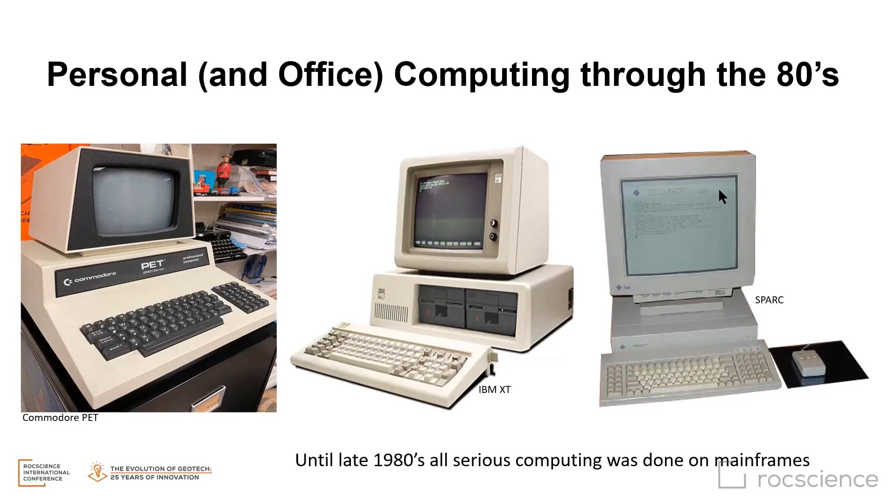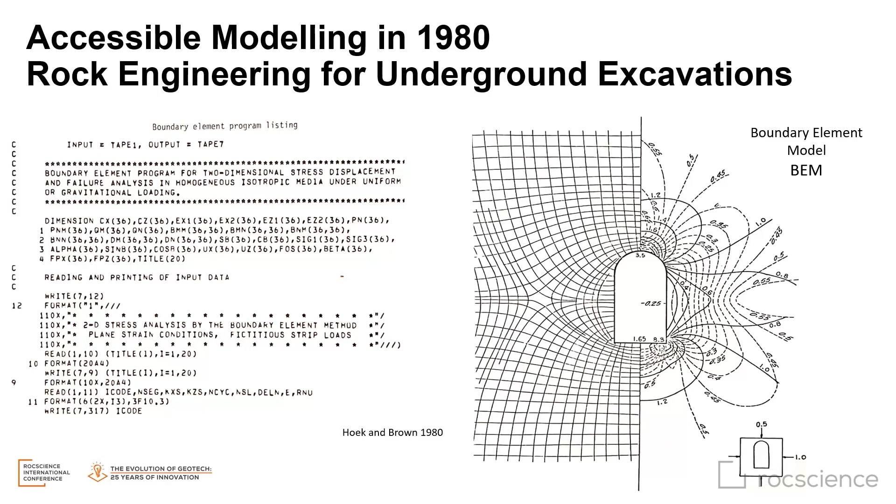My first experience with rock engineering software was the coding of a boundary element program in the back of Hoek and Brown 1980. In the back of that book, there is basic code that can be programmed up even on my Commodore PET with a little bit of input on geometry and stresses and material properties. You can generate a grid from which you can contour the stresses around any opening.

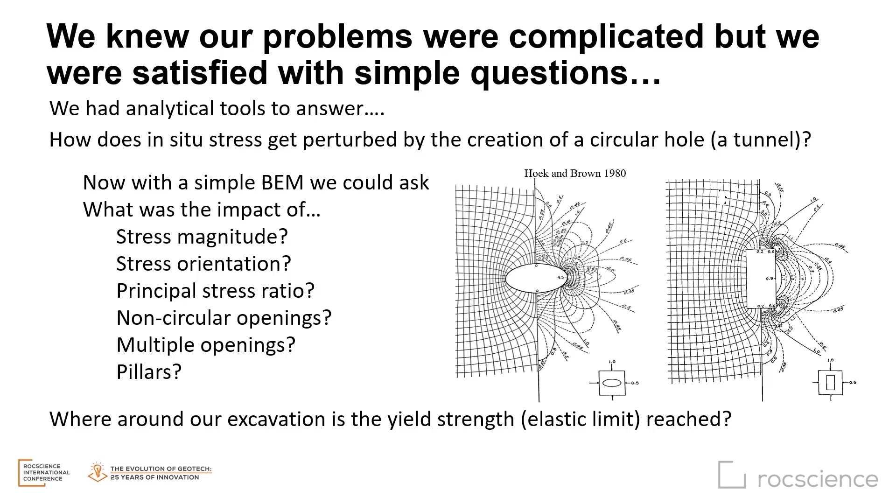Very exciting times. Before that, we had analytical tools to ask how in an elastic material in situ stress can get perturbed by the creation of a circular tunnel. Now with these simple boundary element model tools, we could ask what's the impact of stress magnitude. We could look at orientation, principal stress ratio - didn't have to be isotropic anymore. We could play around with non-circular openings, multiple openings, try to figure out what the true stress state was elastically inside a pillar. Where around our excavation was the yield strength exceeded? These were big questions at the time.

Now, prior to 1988 at University of Toronto, there were many advanced modeling developments in boundary elements, displacement discontinuity models, discrete elements, finite element formulations. I remember some lattice models, fracture flow models. The primary users of these advanced modeling tools were essentially the creators of the models or their colleagues and sponsors.

Also in the 80s, faculty at the University of Minnesota were working on similarly complex advanced models, and they founded the Itasca Consulting Group. In 1984, UDEC was first released for mainframe use. My first experience was with a 3.5-inch disk of MUDEC released for the PC.

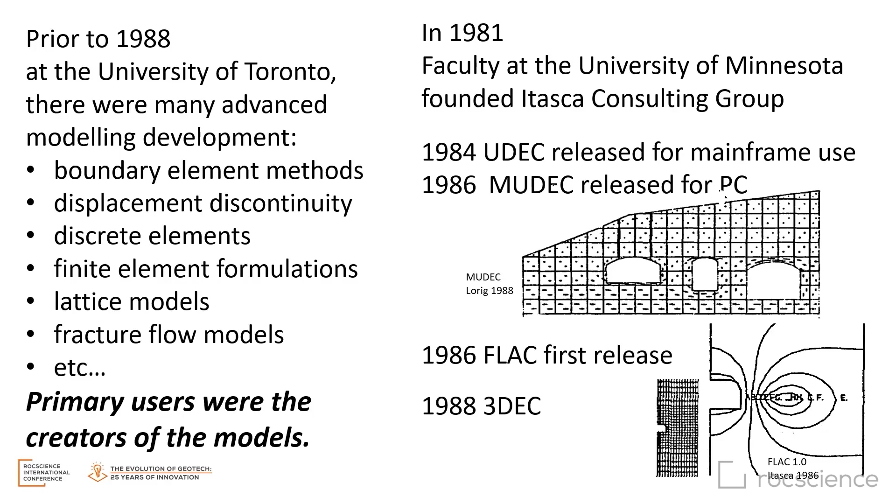FLAC was released in 1986 as well for PC use, and you can see some of the early output there. And 3DEC came along at the end of the 80s.

At the University of Toronto, John Curran and Evert Hoek in 1988 founded the Rock Engineering Group, and they embarked on a mission to make geotechnical analysis software available to practicing mining, construction, and consulting engineers.

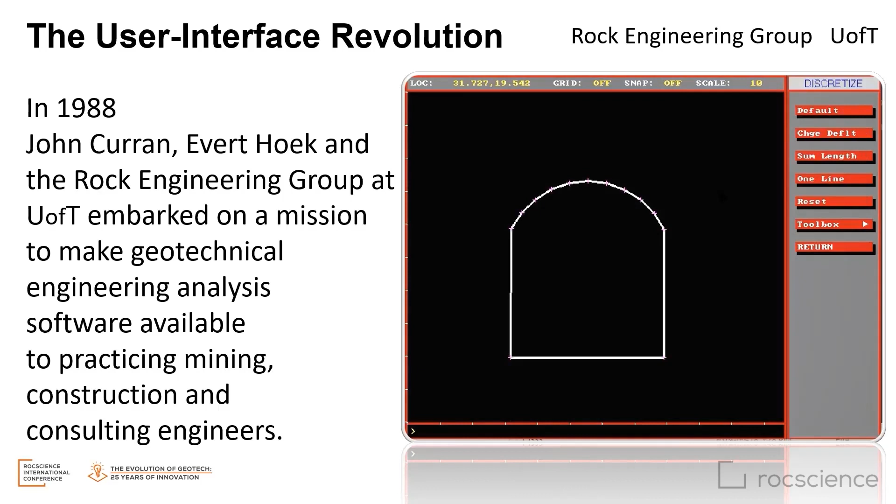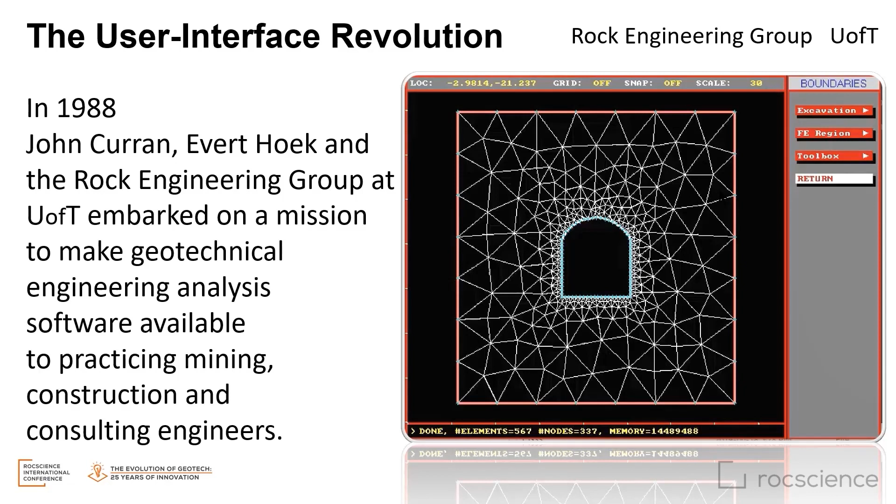On the right, you'll see the early version of Phases, forerunner to RS2. And this screenshot was one of the most exciting times of my graduate school at University of Toronto, when Brent Corkum brought home source code to do automatic meshing around an excavation.

My own personal contribution was in the form of DIPS, for analyzing structural data. This came out in 1988 in some of the beta versions, originally called StudPlot, and worked its way through a number of versions to what we see today.

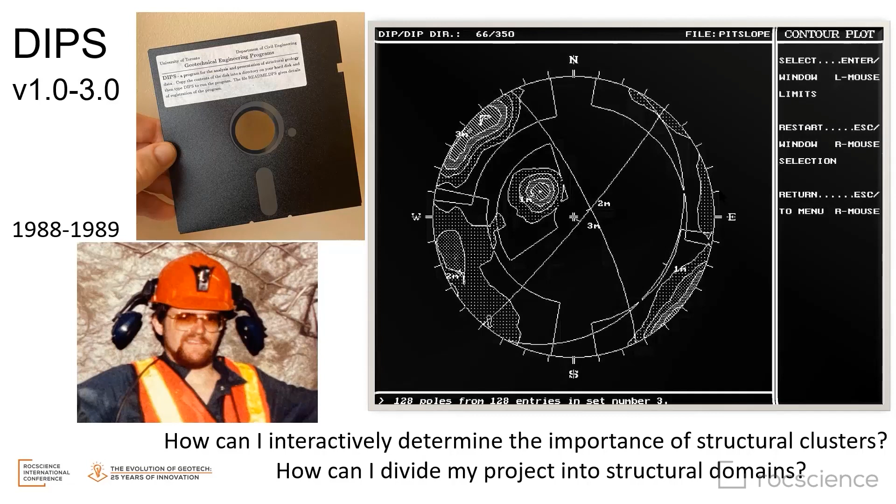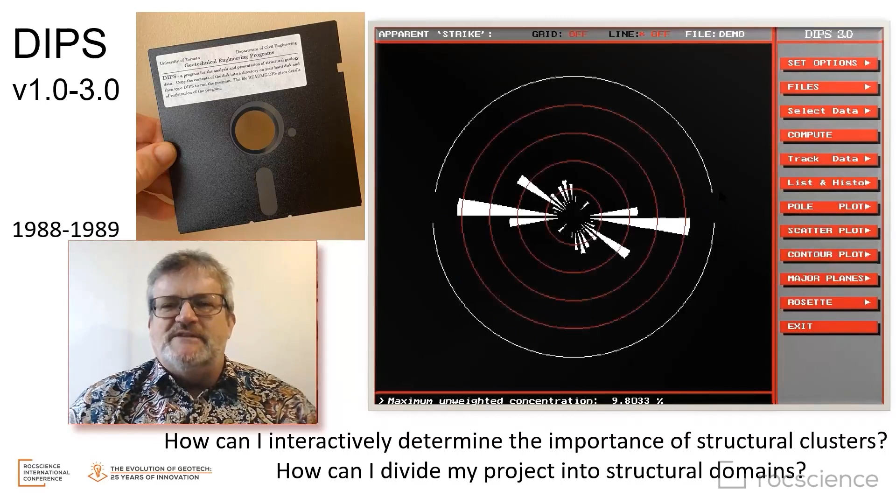With this software, you could ask how to interactively determine the importance of structural clusters. You could play with the data, assess and sort it, and filter it to figure out how you could divide your project into structural domains.

DIPS is still in use today. Rocscience now has added kinematic instability tools, which are very powerful.

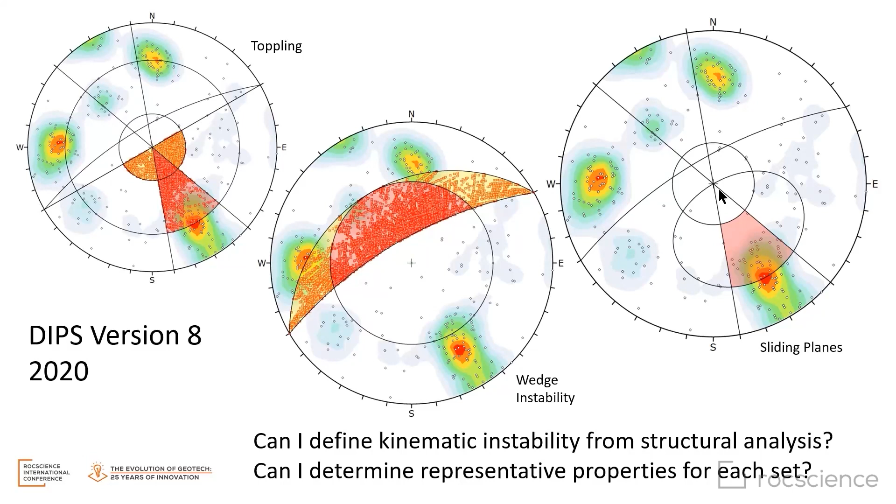Even in the early days, DIPS fed into Unwedge, which was a structural wedge tool, and you can see one of the original versions here.

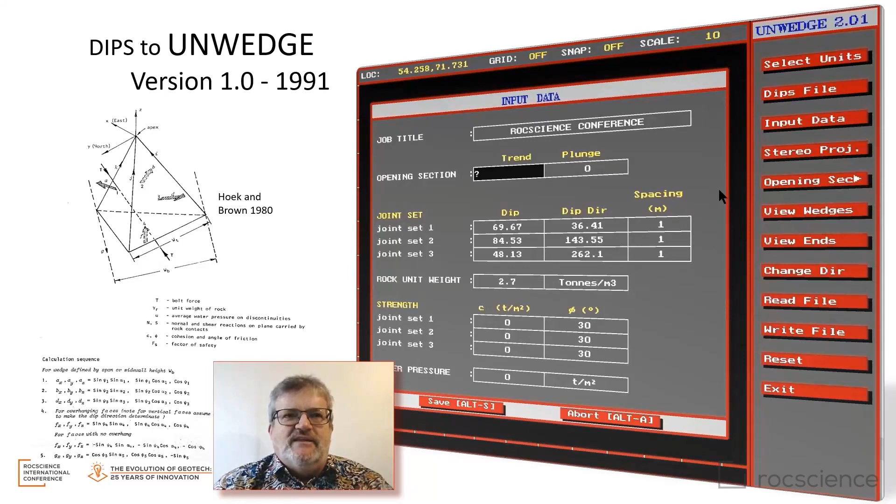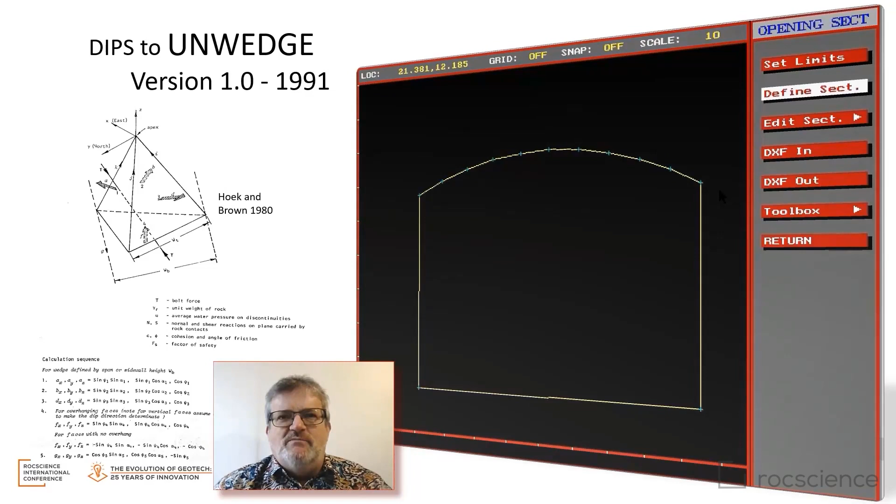And this allowed the user to visualize, again, the formulas that were in the back of Hoek and Brown 1980, to assess how a three-sided wedge would interact with an opening.

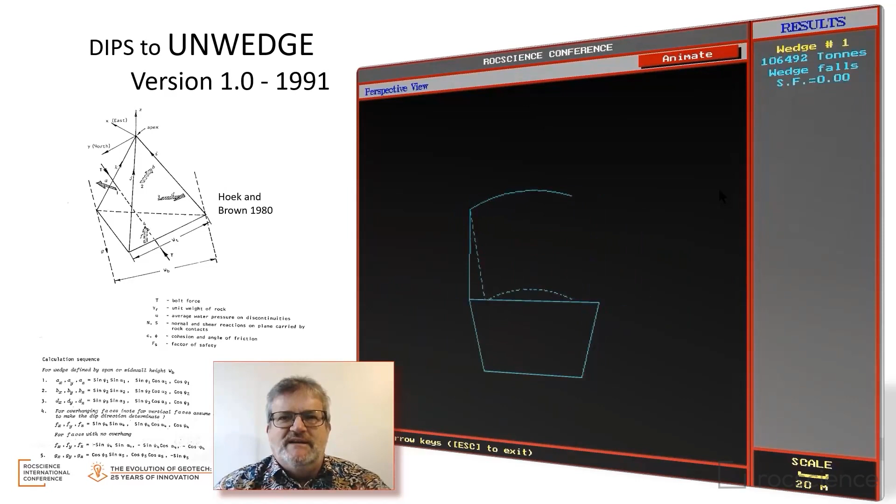And here you can see the original user-friendly, CAD-style input and output, which was quite groundbreaking at the time. This program is still in use today. It's one of the first tools that many tunnelers and cavern designers reach for preliminary analysis and even in some cases support analysis.

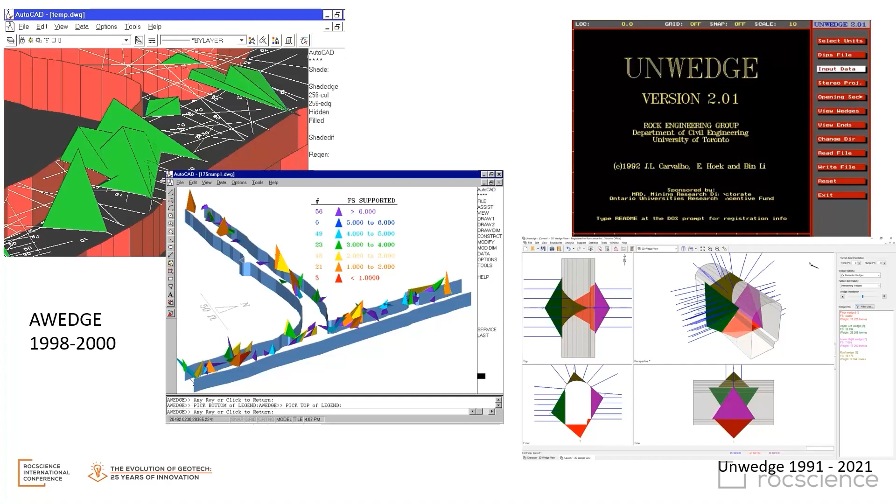Using the same formulas from the back of Hoek and Brown, end of the 90s, I also developed a piece of software called AWedge, which was built into AutoCAD to do a similar set of analyses, but for discrete wedges in discrete locations based on actual mapping.

Unwedge itself lives on. This is just some work I did some years ago in the Brockville Tunnel, which is now open for tourists. It's a fabulous location when COVID's over to go visit.

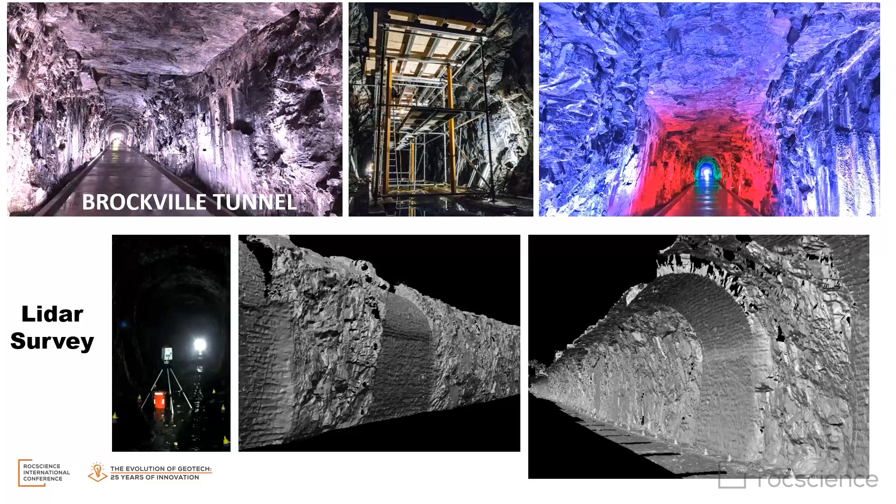But as part of this feasibility safety stage to reopen this tunnel, we did some LiDAR scans. Those LiDAR scans were automatically turned into StereoNets.

And then using DIPS and Unwedge, we were able to show where bolts were needed, but more importantly, where the unstable blocks had already fallen out during construction, and we could retain as much as possible of the original tunnel profiles, just using a simple tool like Unwedge.

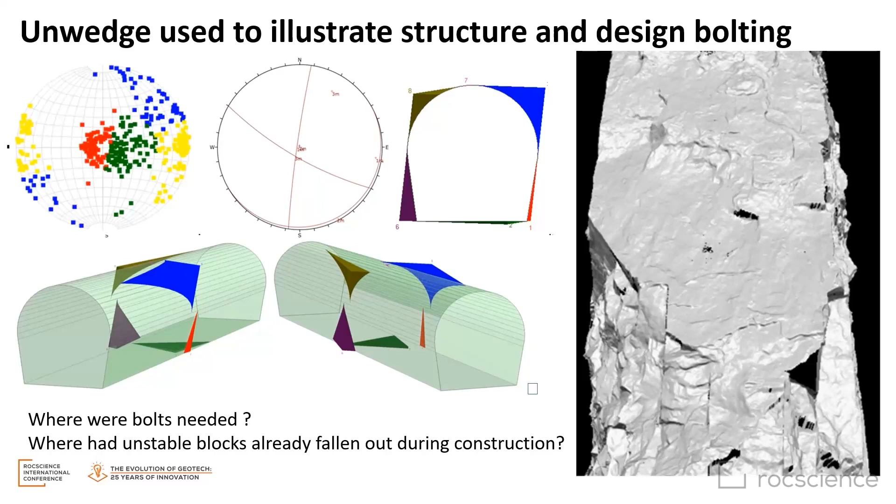Now, Examine 2D grew from this source code in the back of Hoek and Brown, and it was, again, a very simple actual algorithm, but incorporated into a user-friendly framework. This was, I believe, our first release from the Rock Engineering Group at U of T.

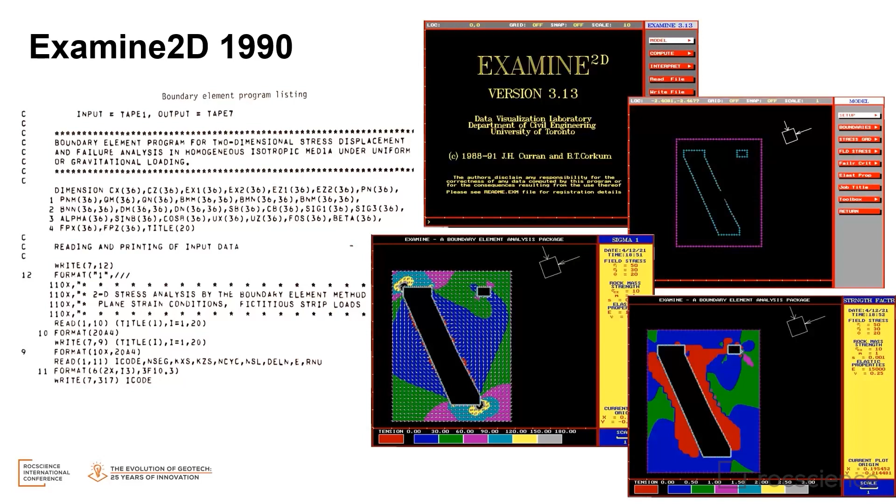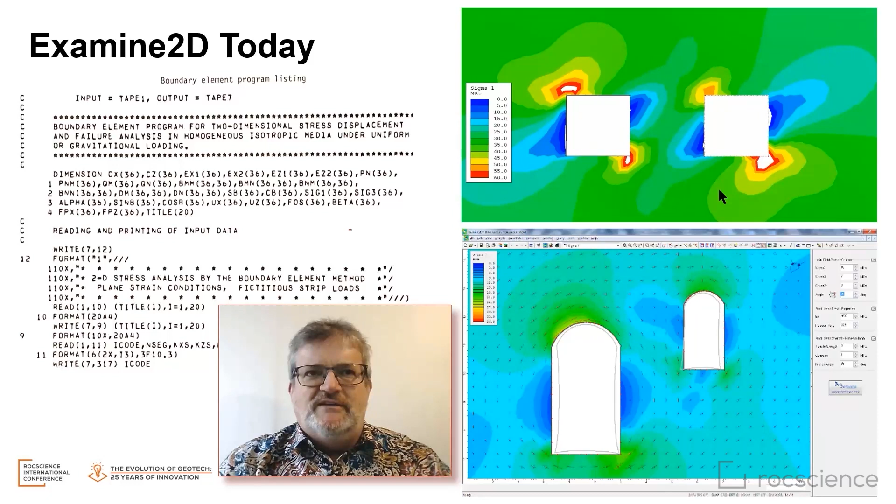And this program today is still extremely useful for education. There's nothing like real-time examination of stress flow around openings. It's been coded up as well into Windows, and I think there's still a future in Examine 2D.

Now, of course, this basic idea can be expanded into 3D, and these models were around prior to the 90s, but their incorporation into 3D user-friendly software in the form of Examine 3D or Map 3D really revolutionized mining analysis in particular, and complex cavern geometries where tunnels are intersecting.

Here we could look at how the interaction of excavations changed the stress field. Could we optimize geometries for the stress? How would large mine openings affect smaller distant tunnels? These were all questions that were now open to be answered through 3D elastic modeling.

Now, we knew that the modeling was elastic and that yield was not happening. But as long as we limited our questions within those constraints, it was incredibly powerful.

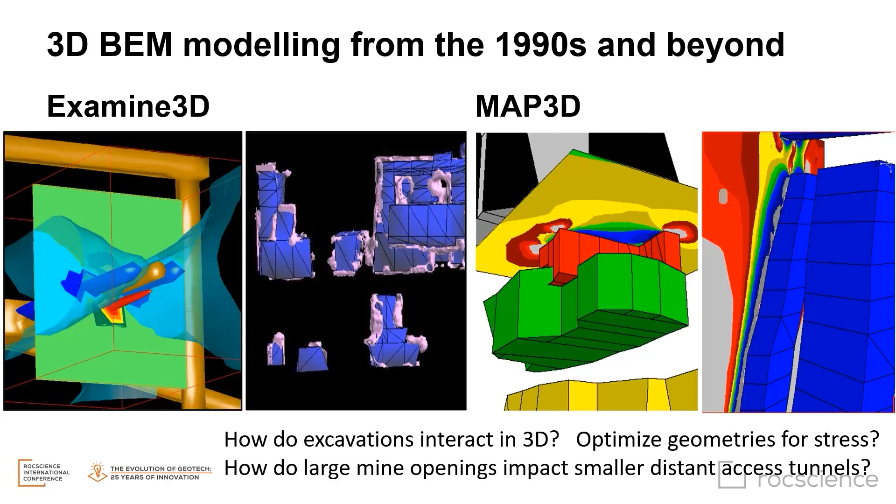So interestingly enough, the rise of user-friendly software coincided with a major celebration of rock engineering in the form of the 5-volume comprehensive rock engineering set published in the early 90s. One could say that those volumes were a celebration of elite rock engineering done by experts.

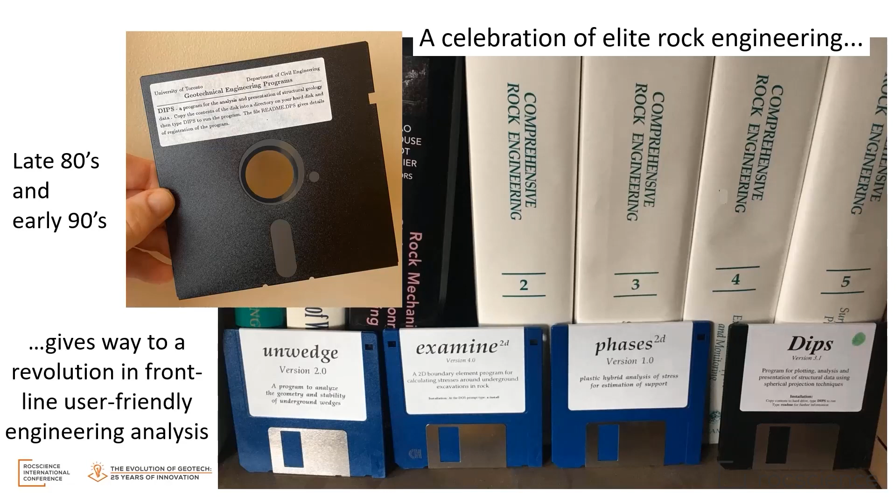And this revolution in user-friendly interface development gave way to frontline rock engineering. And I'll say, for better, for worse.

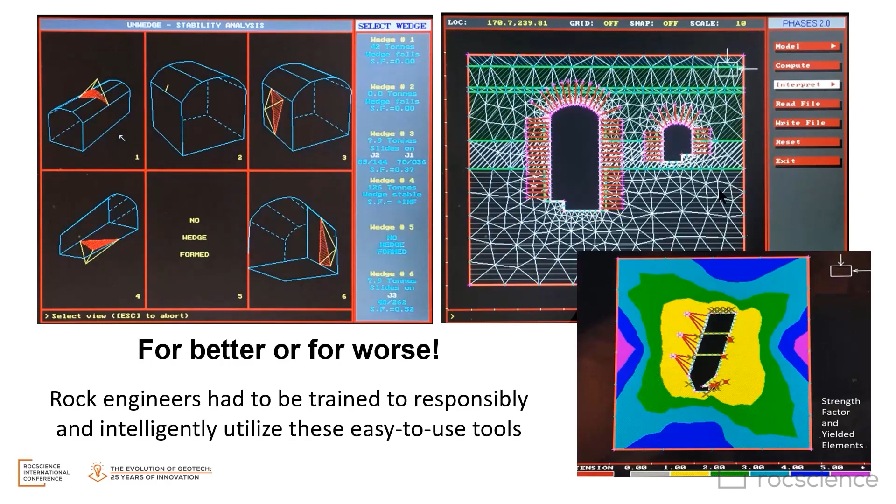Of course, lots of people worried that these models in the hands of a non-expert were dangerous. But I would argue that with proper training, the ability to do what-if scenarios, to answer simple questions in situ without going to a consultant, was one of the biggest contributions of the rock engineering group and ultimately Rocscience, and of course Itasca as well, following suit.

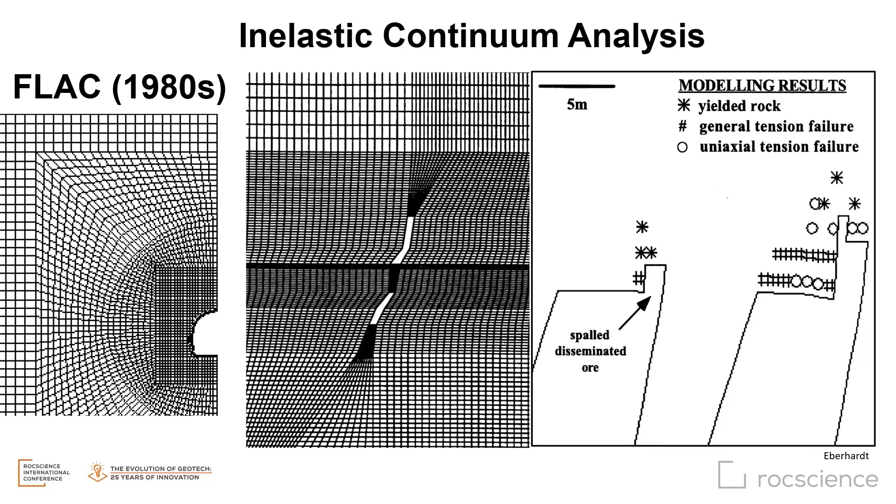Here you can see some early FLAC analysis, some early FLAC results in the inelastic continuum. This also became user-friendly in the 90s, and it posed a problem: now we had to figure out what our continuum rock mass strength and stiffness was.

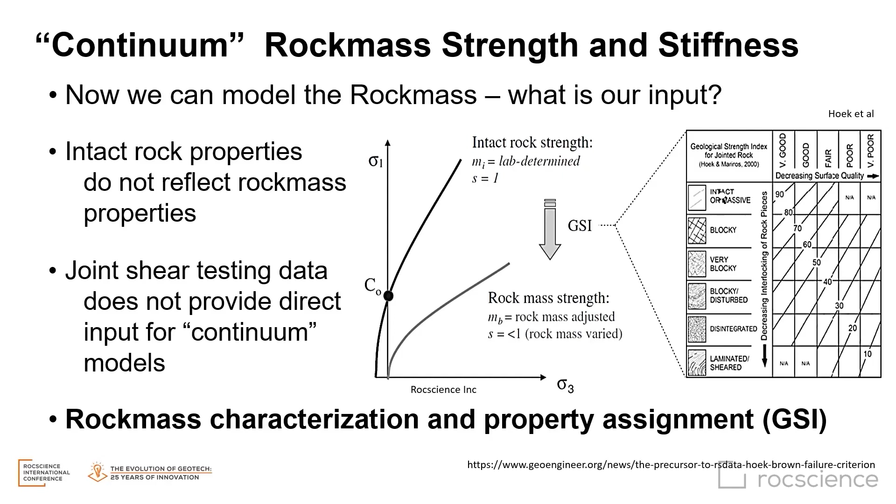Dr. Evert Hoek was the primary author of the GSI system, which allowed us to characterize the rock in situ and convert that characterization into a factoring for rock mass strength and stiffness. We realized that intact properties did not reflect the rock mass properties in the field, and joint property data didn't really have a place in our continuum models. So at the time, GSI was the only way to get rock mass properties into a model.

Inelastic continuum modeling we could do in the past without these tools, but we could only answer simple questions about yield in a circular and isotropic stress field. Within a program setting, we could look at yield in anisotropic stresses, yield around non-circular openings, and experiment with the effect of post-yield response and multiple openings.

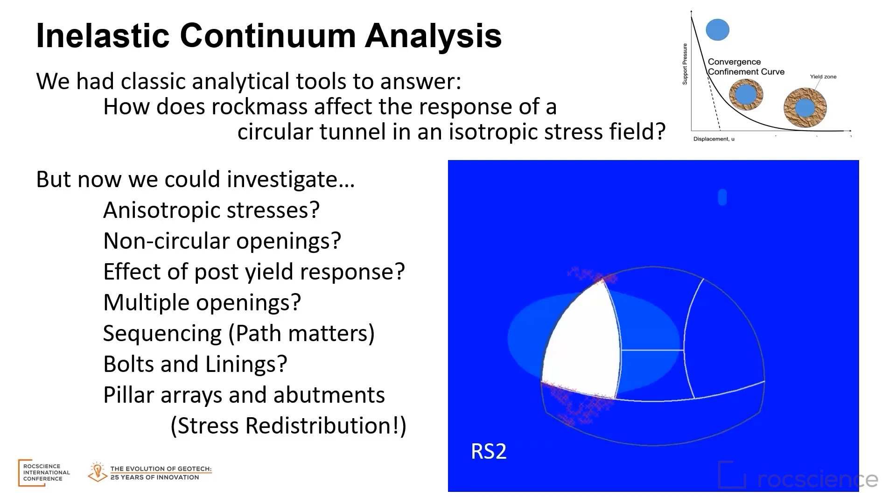Sequencing became a major concern because once rock begins to yield, the path matters. So we could optimize excavation sequence for sequential excavation, and we had the power to examine support and look at stress redistribution for the first time as well.

There are many, many forms of continuum geotechnical models today. The Rocscience and the Itasca codes are just two of the suite of programs that are out there. But the very powerful user interface connected with very powerful algorithms today, I would say, dates back to those early days in the late 80s and early 90s.

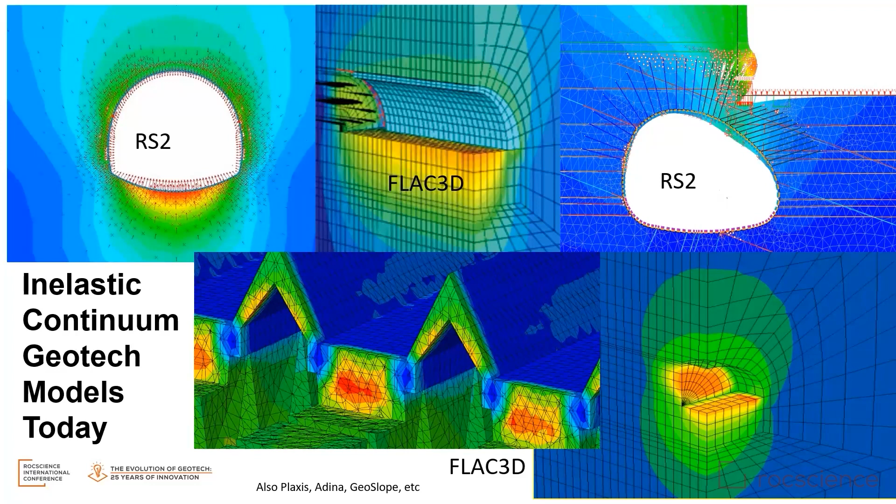I'll pause here just to ask, speaking from the practitioner, the field engineering viewpoint: when we use these programs for design, are we asking any more sophisticated questions than we did, let's say, in 1980 or in the 1990s?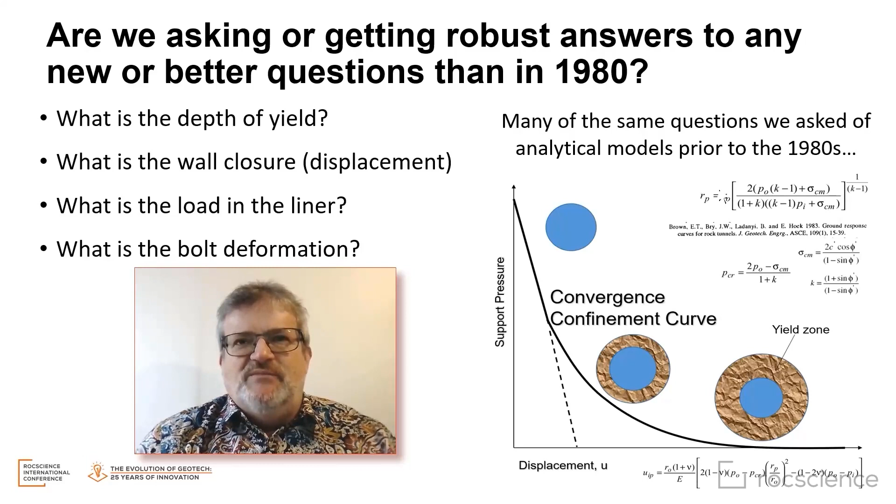Primarily, we're modeling to find out the depth of yield, how much closure there is, or average closure in the walls and roof, what's the load on a liner, and what are the bolt deformations. So while we have more complicated models and can view more complicated scenarios, the questions are pretty much the same that we asked back in the 1980s with our analytical solutions.

Now, there are some new questions that we can start to answer, and we do. What is the post-yield behavior of a rock mass? That's a big question. Does the post-yield lab response, which we can now measure in our lab experiments, mean anything in the field? How do you model post-yield for an in-situ rock?

We have tools, we don't know if they're correct. How about for a rock mass? How do you measure or specify dilation parameters, the volume change after yield in a rock mass? How much yield is too much? If you have a complicated system, material yield does not immediately mean that the system is failing.

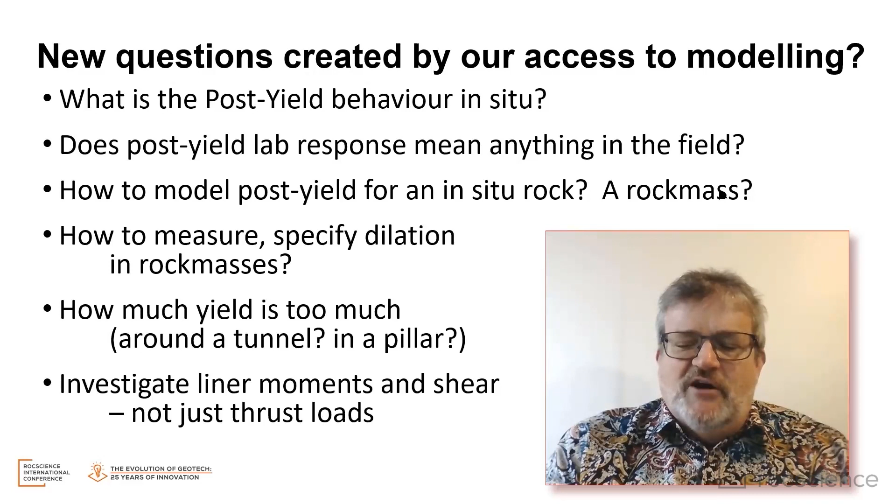Now we can also investigate liner moments and shear in our tunnel linings, not just thrust loads, and we can analyze in a much more sophisticated way the rock support interaction. I'll just tackle a few of these issues.

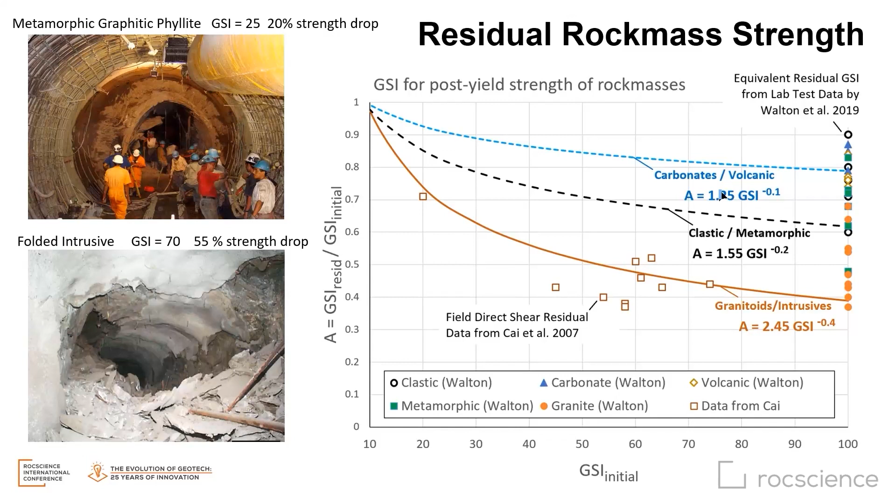So rock mass strength, post-yield or residual rock mass strength - I would argue that we still have no solid tools to estimate residual rock mass strength. In the paper, I propose a possible solution to this problem, coupled with a dilation model.

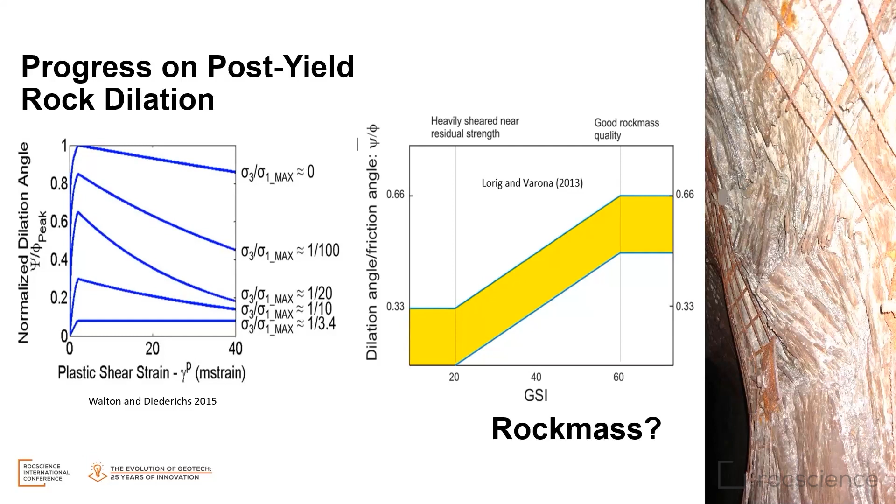We have some guidance from intact experiments, and some guidance from basically experience, but these are all very approximate tools. I'd argue that we need more sophisticated versions of these to move forward.

One question that's of great interest, both in mining but also in civil construction, is when do pillars or a pillar fail as a system? We can track rock yield, but that doesn't necessarily mean pillar failure.

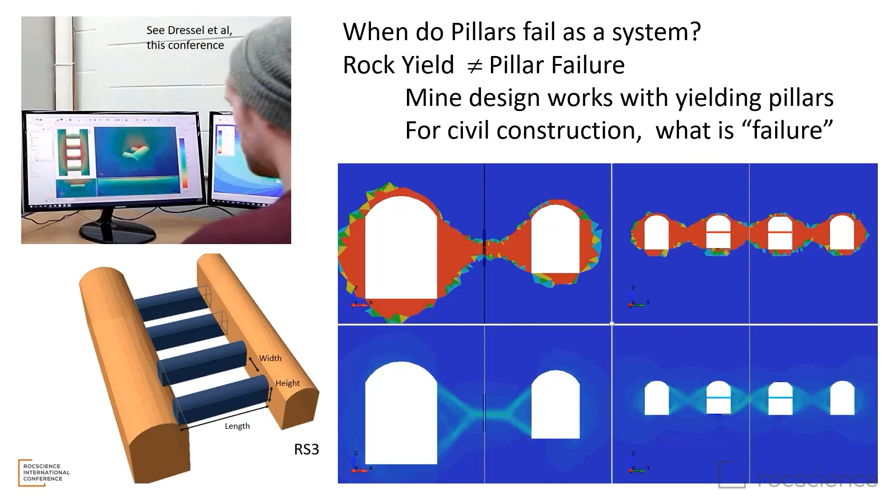So mining design works with yielding pillars all the time. For a civil construction project, first we have to define what we mean by failure and then how we measure that in our models. Now in mining, we use sophisticated 3D mine-wide models along with seismicity to track the yield of the rock mass and the effect that has on the surrounding rock and other regions.

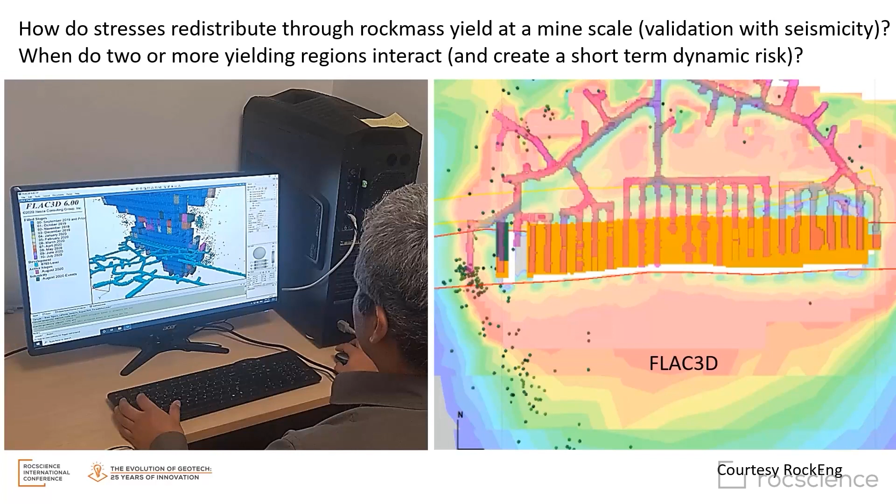One of the big questions, of course, is when do two or more of these regions interact, creating sort of a short-term rise in activity at the mine and possibly a dynamic risk.

We also have the ability to use these tools for complicated sequential design in non-mining applications. Although this is a mine, it's essentially a civil construction of a 150 meter high double crusher station. You can see the FLAC 3D results on the right, looking at how stresses flow as the material gets constructed.

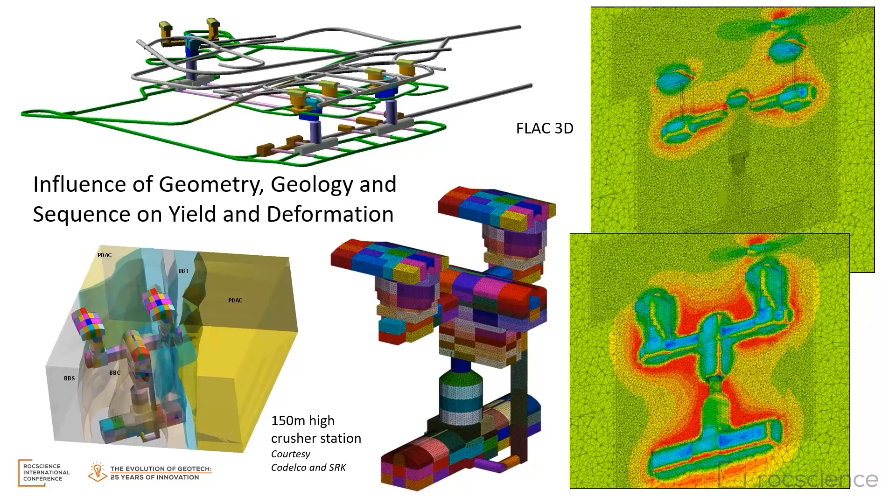There's multiple geologies in this model, and each color represents a construction stage. Just picking out one stage here for the upper loading bay. For the various bolting scenarios, we can look at bolt response, loading of the bolts, and the moment and thrust capacity of the liners compared to our design targets.

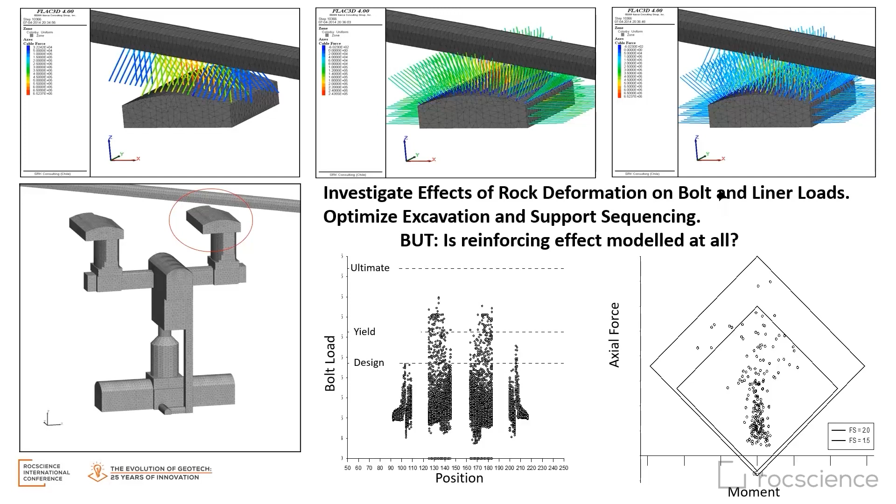But we're not really asking what the support is doing in the model. This is one of the problems with continuum modeling that we live with, so we make sure we simplify our questions accordingly. We're not modeling the reinforcement effect of the support in the rock mass, we're modeling the effect of the rock mass deformations on the support.

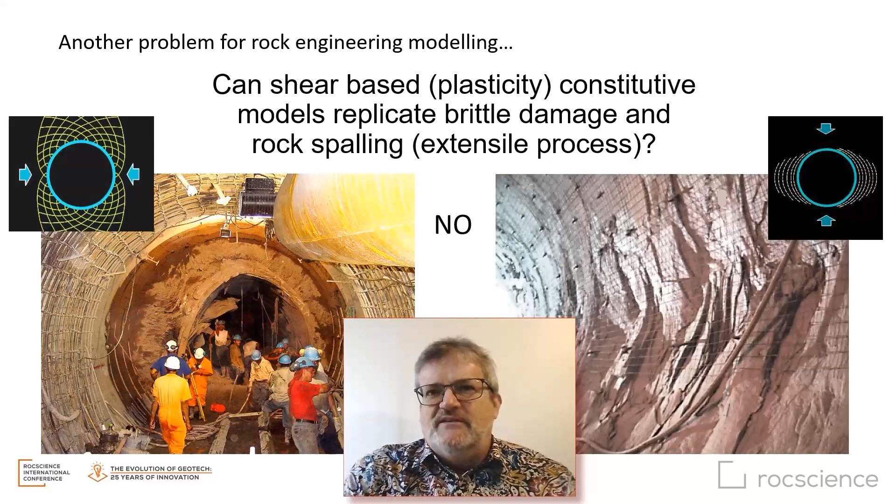Another challenge for rock engineering modeling: can conventional shear-based constitutive models, traditionally used in continuum modeling, replicate brittle damage and rock spalling? In theory, no. Where we have squeezing tunnels, the model we base the analysis on assumes everything is shear-based, whereas we know brittle fracturing, particularly in early stages, results from extension fractures. So can we still use continuum models to do design analysis for this type of behavior?

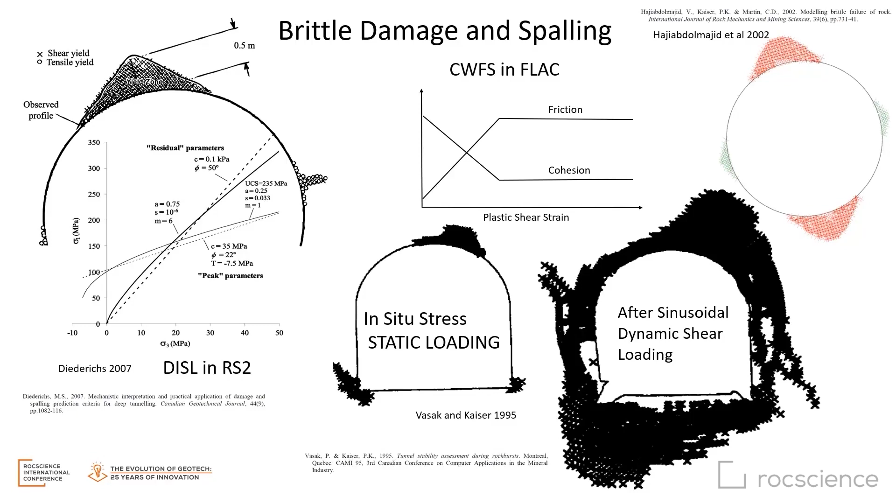The answer is yes. There have been two developments over the last 25 years. One is cohesion weakening friction strengthening, which works well in FLAC, a time-stepping algorithm, based on the notion that cohesion and friction are not mobilized at the same time in brittle materials. As cohesion loss occurs, friction increases, creating a brittle fracturing mechanism at lower confining stresses. On the left is the equivalent version for a program like RS2, which has instantaneous drop from peak to residual. You can still very accurately replicate brittle fracture in a continuum model.

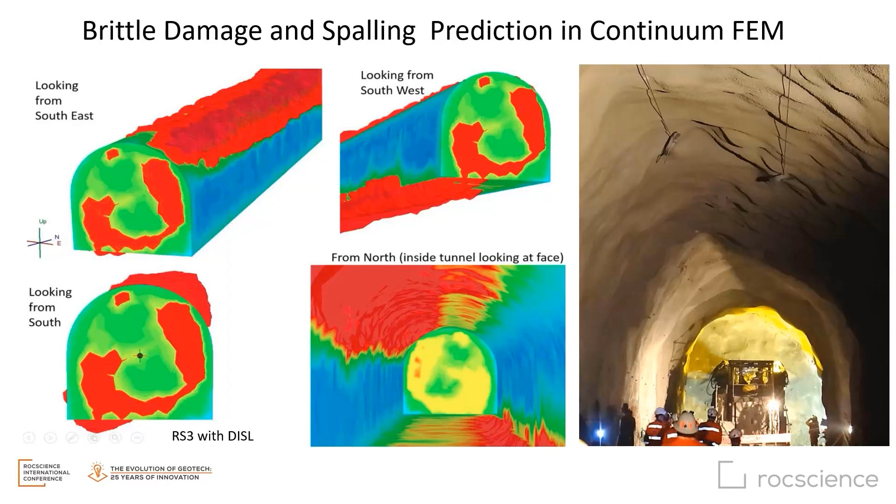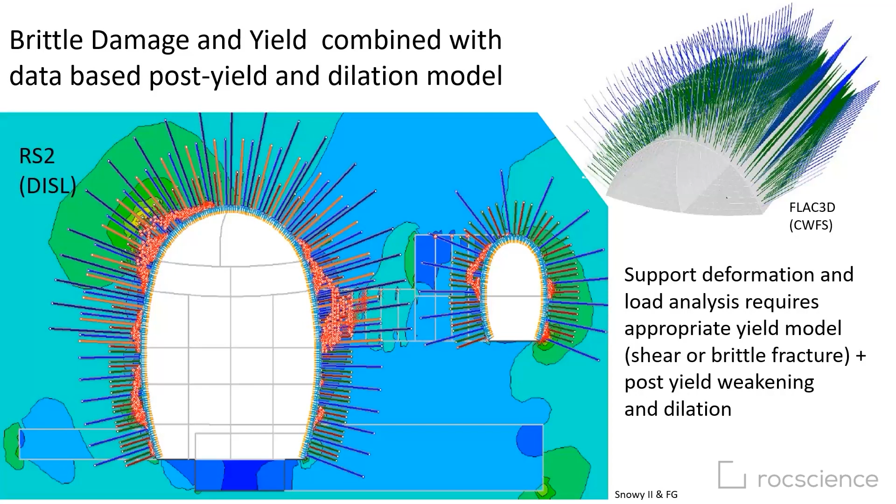This is very important because when simulating situations like this in an access tunnel, the brittle model is key to giving appropriate overbreak estimations and the risk of floor heave. If we combine brittle criterion with optimized dilation models, we can do much better estimating support requirements and support demand for brittle rock around excavations such as power caverns, leading to optimized support element design and component design.

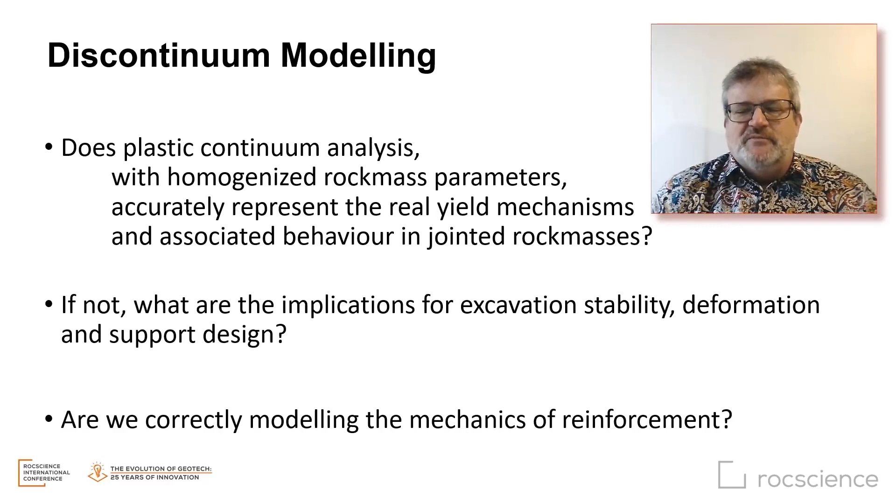Discontinuum modeling has actually been around longer than some of the continuum tools we have. We have to ask: does plastic continuum analysis with homogenized rock mass parameters, GSI, accurately represent the real yield mechanisms in moderately jointed rock masses? And if not, what are the implications for stability, deformation, and design? Are we correctly modeling the mechanics of reinforcement if we smear all the rock mass structure into an equivalent continuum?

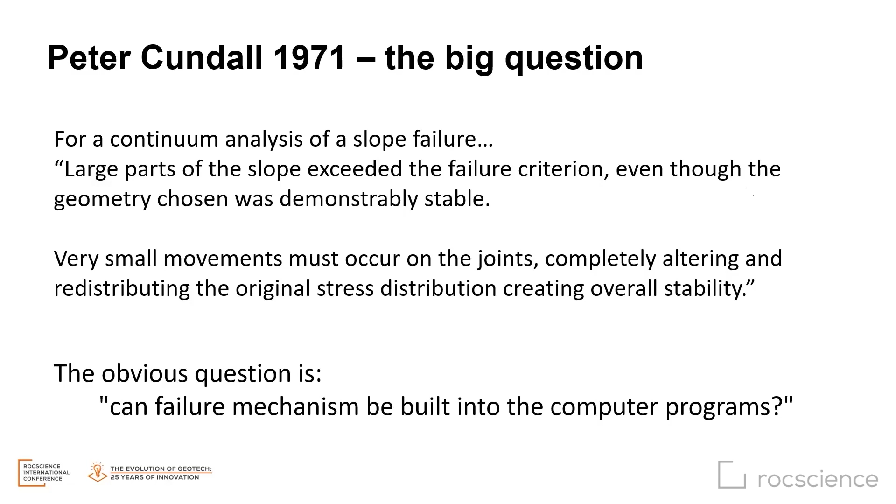I take us back to 1971, when Peter Cundall wrote his PhD researching rock slope failure. In one part of that document, he examines a continuum analysis of a slope failure problem and asks: why did large parts of the slope exceed the failure criterion, even though the geometry chosen was demonstrably stable? He concludes that very small movements must occur on the joints in the real situation, completely altering and redistributing the original stress distribution, creating overall stability. The question he asked in 1971 was: can failure mechanisms be built into computer programs?

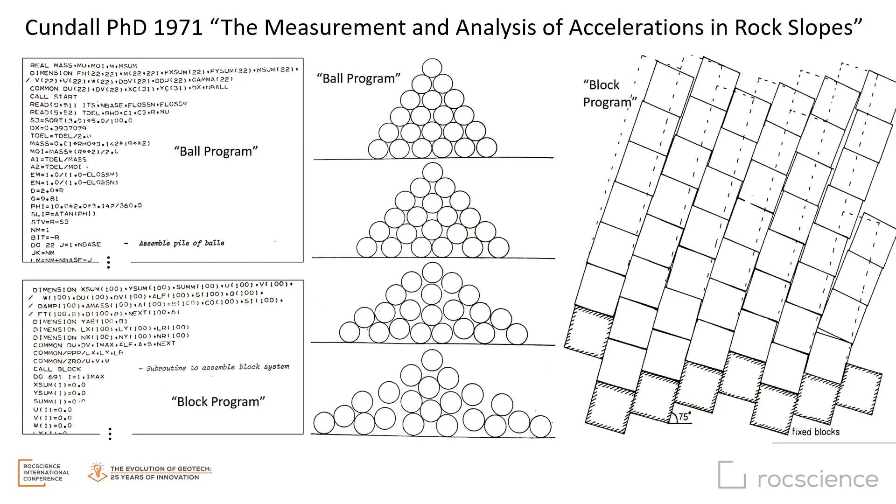In the appendices of this PhD on slope stability, you'll find the original source code for the ball program and the block program, which we now know as PFC and UDEC. The key to these early discontinuum models was to keep the questions as simple as possible, because these models were incredibly complex and chaotic. I remember using these in the early days and being astounded by how one small change would change the outcome of the model. So the key is to ask very simple questions.

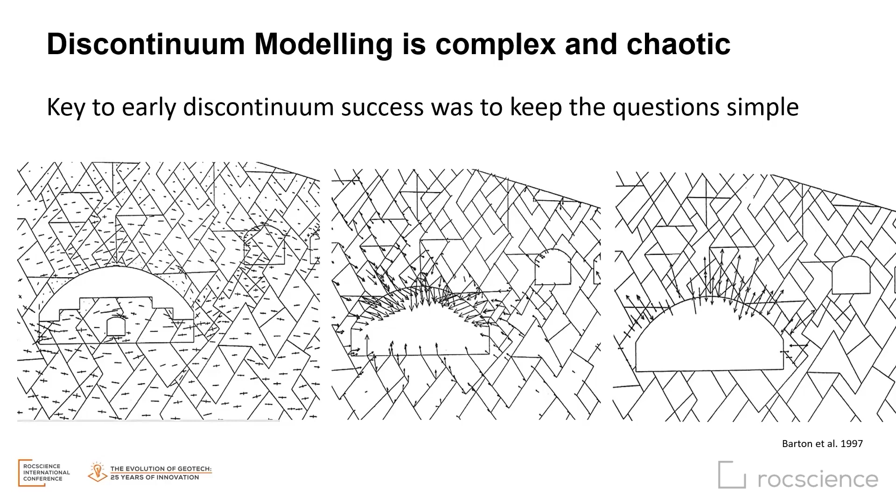This particular analysis from Barton et al. '97 of a hockey cavern in Norway, the largest cavern I believe still to be constructed for civil purposes, the key to that design and its successful application was the questions asked. Simply: can rough joints modeled with confinement-dependent strength and post-yield dilation create a stable and clamped arch? How big could that arch be? Was there an optimum sequential construction sequence to achieve that arching?

In other words, letting the rock mass do its own work. And then, can reinforcement knit any mobile blocks together at this large scale to limit localized slip and create a reliable, stable arch?

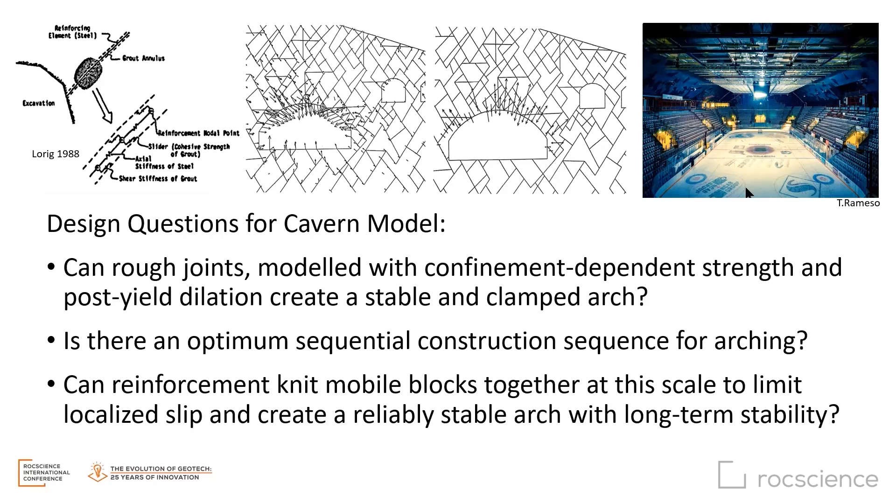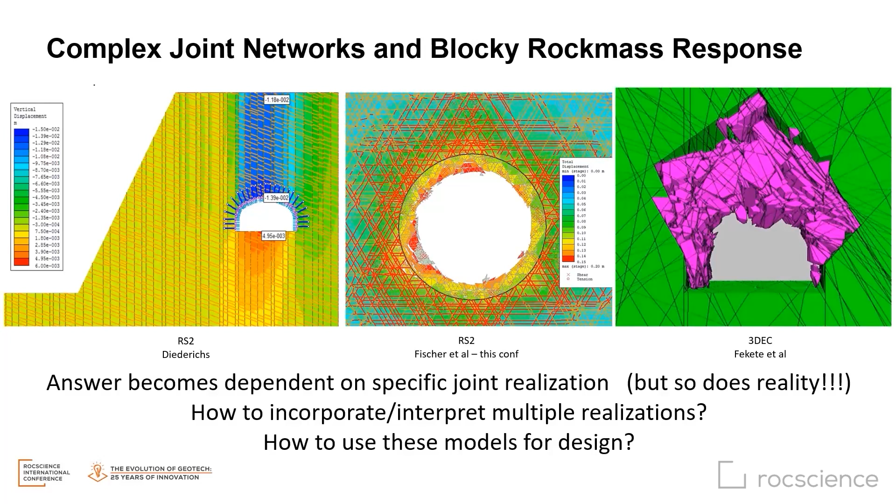Of course, now we have very sophisticated versions of these discontinuum tools. The answer, however, is very dependent on the specific realization, the random generation of the joint elements themselves. But in actual fact, so is reality. So in a sense, this is the complexity of the model mirroring reality. The challenge is how do we incorporate or interpret multiple realizations and then use those for a reasonably repetitive and robust design?

Now, in recent years, LiDAR has come along as a very powerful and routine tool in surveying of underground openings. We can take two surveys at some time apart, compare them, and get an actual 3D map of the deformation.

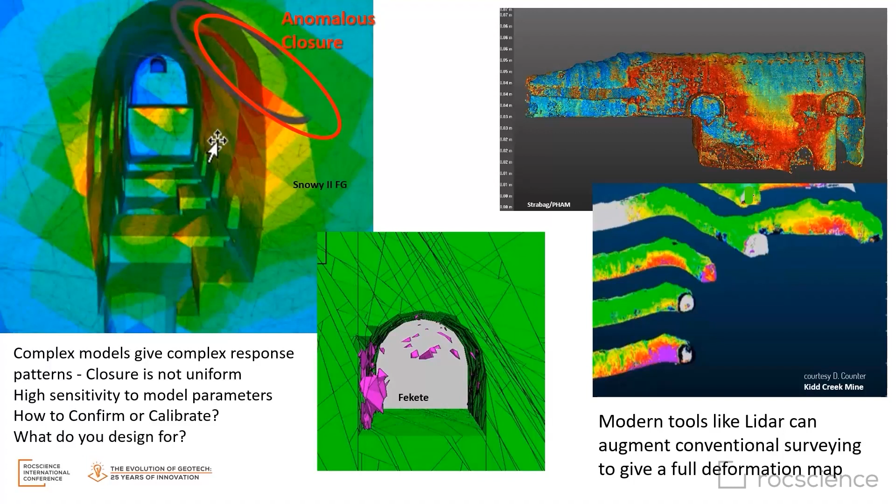Now, a lot of questions, small and large, raise their head when we do discontinuum modeling. Do we have the right models for the joint surfaces? There are very many commercial constitutive models for joints out there. Do we have the right one to best represent what's going on our particular fresh, rough, altered, slickensided joint surface? How do we take 50 millimeter lab samples in direct shear and upscale them to 2D and 3D?

Now with these discontinuum tools, we realize that joint stiffness actually has a meaning beyond just settlement. How do we incorporate that into the model? What numbers should we use? And is the test actually giving us the right numbers for modeling? How do we measure this behavior and compare it to reality?

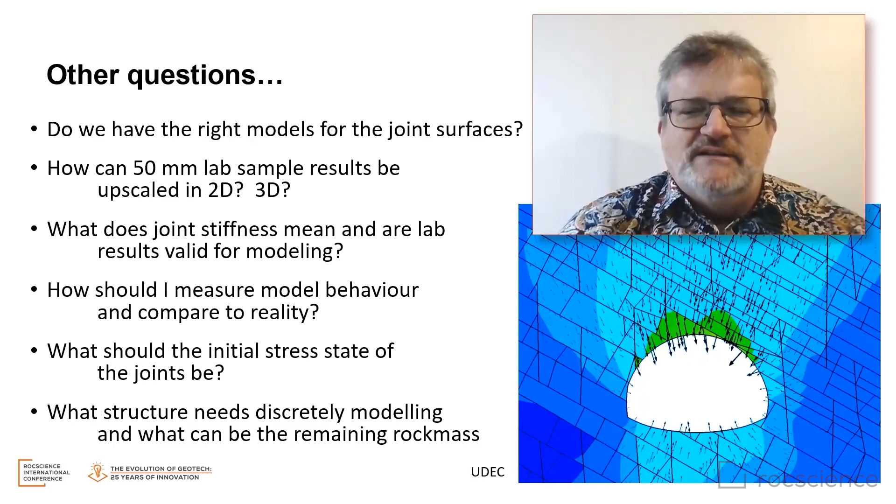There's other issues about how do we initialize the joints in their stress field? And what structure do we need to actually model to get the right answer? And what can we just leave as part of the remaining rock mass?

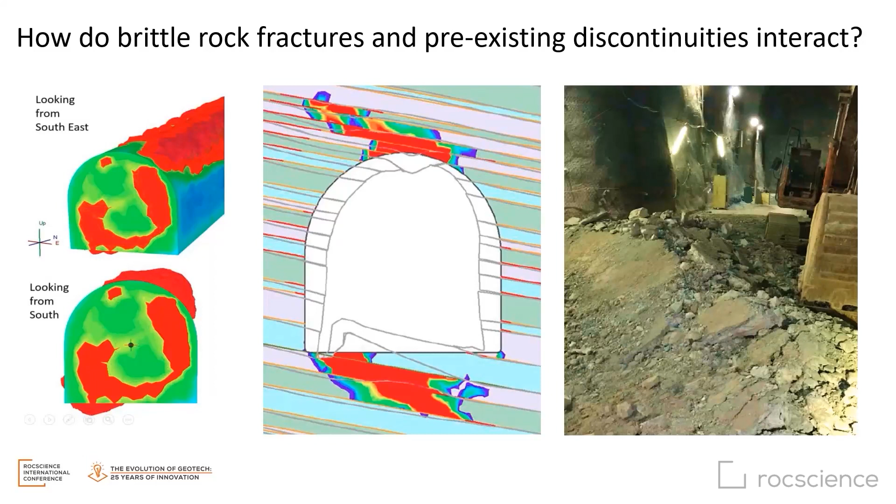In my own work, I've used discontinuum tools to examine how brittle rock fracture processes and pre-existing discontinuities, bedding or joints, interact to create very large-scale and anomalous failure modes. In this case, brittle fracture interacting with unfavorable bedding planes, in this case volcanic bedding, to create a very localized but very aggressive floor heave.

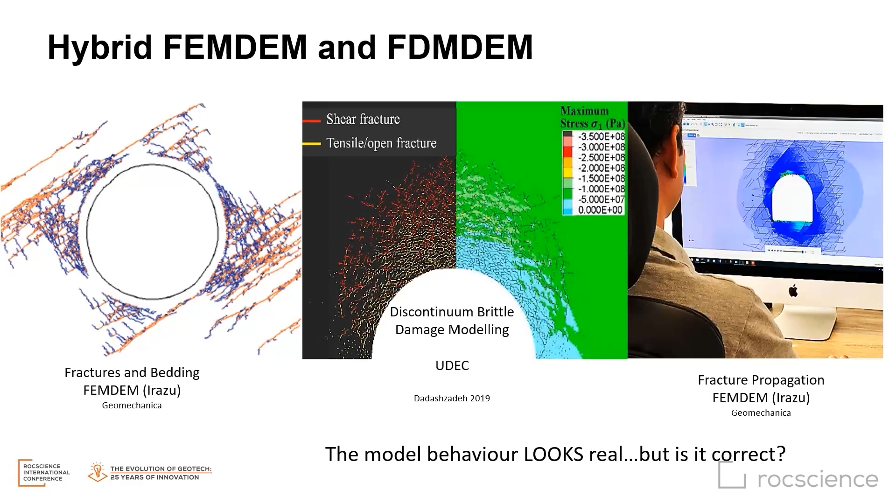Now we have very sophisticated hybrid tools, if you will. I've got a couple examples here of FEMDEM from Geomechanica and U of T, and UDEC from Itasca, looking at how rock fractures move up into the rock mass and interact. These fractures can then also be used in a coupled model to see how permeability of the rock mass increases, etc.

Some other issues that we're starting to realize are becoming a very big challenge in complex rock mass modeling: time-dependent behavior, which we've played around with for many decades. Creep, consolidation, relaxation, degradation, swelling. Whatever the mechanism is, we have numerical models that claim to simulate that behavior, but the models are very simple. They're often phenomenological, not very mechanistic in nature, which gives us difficulties when we take lab experiments and try to upscale them to some realistic properties and then apply them in the complex geometry and geology of our models. We have no tools for estimating time dependency of real rock masses.

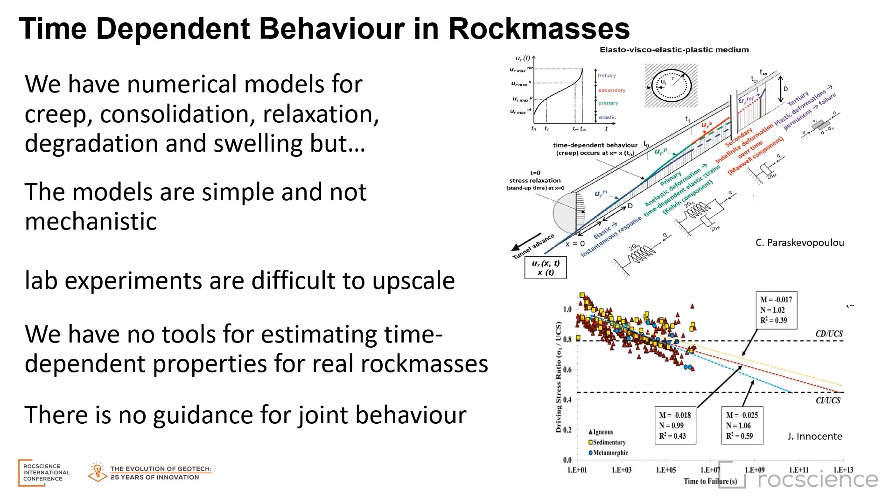And there's certainly no guidance for joint behavior in a time-dependent sense. So big challenges as we move forward, particularly in areas like nuclear waste management.

And then we have the challenge of hydraulic coupling. In low porosity jointed rock or high porosity rock, we have tools that allow us to look at drainage, effective stress. The image on the right is from Beck Engineering, a full mine-wide, fully hydraulically coupled jointed rock mass model, looking at how rock mass movements around the mine affect the structure, which in turn affects permeability, which in turn affects the hydrological regime. But how do we understand the fluid flow and the fractures in the rock mass at depth in a constitutive way?

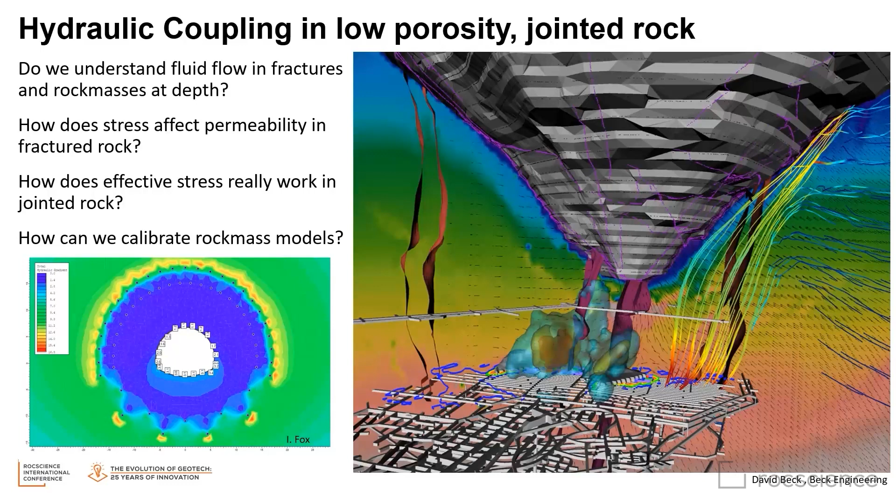How do the stresses affect the permeabilities? We have models for that, but how do we validate it, verify it?

So I want to go back to a paper that was written in 1988. It was part of the required reading when I was a grad student at U of T: Starfield and Cundall, Towards a Methodology for Rock Mechanics Modeling. And they make the comment that there was a time when the focus of attention in rock mechanics was on laboratory and field measurement. Models which existed in a mainframe capacity were generally thought to be irrelevant or inadequate.

This was probably due to the lack of geological detail, and this lack of geological detail was a major stumbling block to early acceptance of modeling in rock mechanics. That's a quote from the paper.

I would say the failure was in the expectation that the models should themselves tell the whole story. I see this in students who create their first model, or people who are new to modeling. They expect the program to create both the questions and the answers. Whereas models are designed to be asked very specific and constrained questions, and then the answers should be dealt with within that context.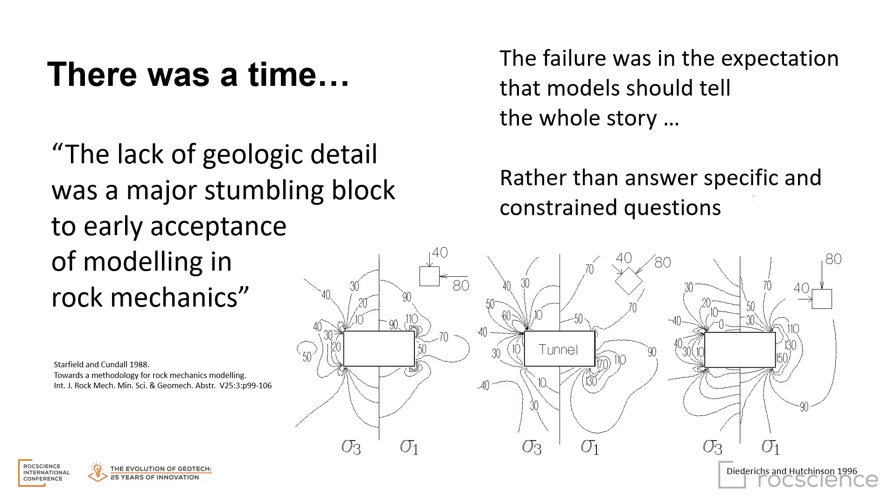Now, that said, greater complexity is terrific. The ability to include more detail is welcome, but only up to a point. So the downside of more complex, apparently more realistic models is that the modeler, and again this is a quote from Starfield and Cundall, becomes hooked on an addictive credo that more detail implies a better model. Bigger and better models in turn need more data, leading to the need for more field and laboratory measurements.

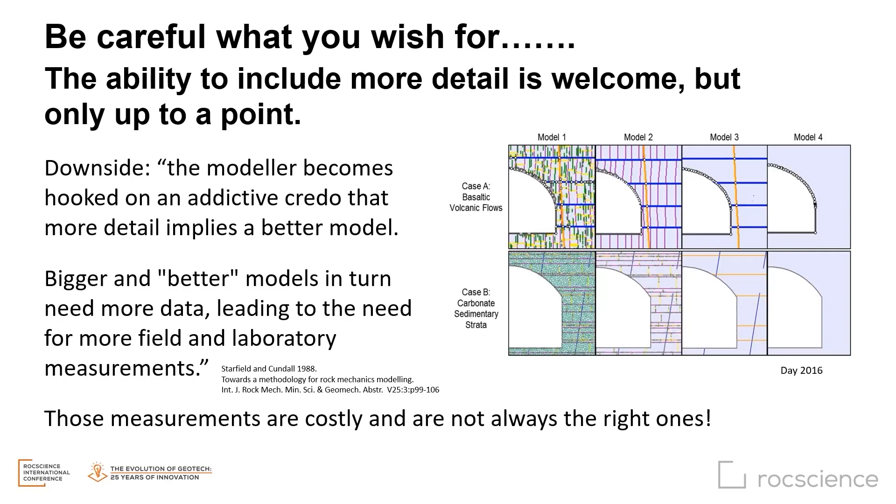Now the problem is that those measurements are costly and are not always the right measurements. We don't currently do routine site investigation to collect data to feed into these complex models. We build models because the real world is too complex for understanding. It doesn't help if we build models that are too complex just because we want them to be complex.

Another quote from Starfield and Cundall: the art of modeling lies in determining what aspects of the geology are essential for the model. The challenge is to turn that art into a methodology. And when we have these sophisticated, complex, all singing, all dancing models, how do we know the results, however impressive, are valid and correct?

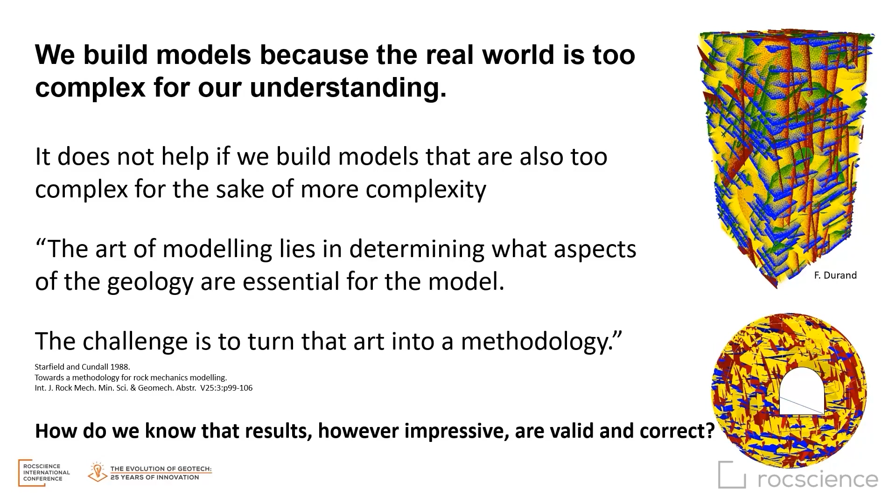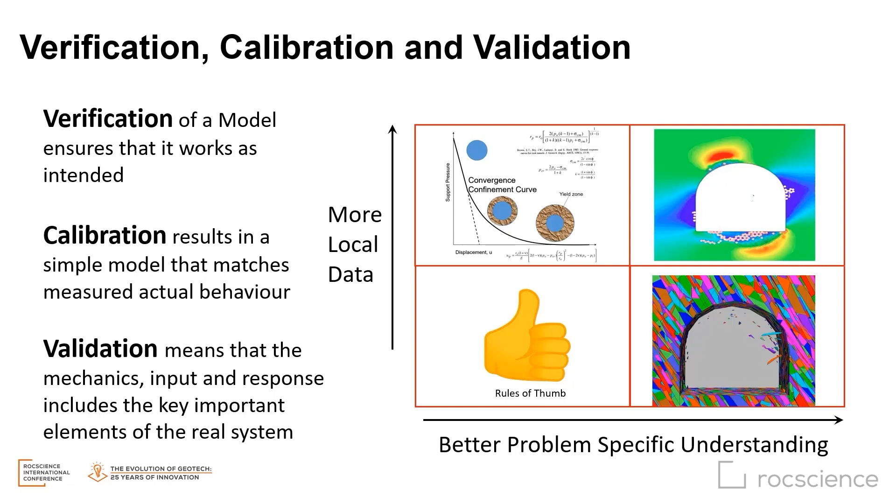So there are problems where we have lots of data, there are problems where we have lots of understanding, and there are problems where we have neither or both. And this idea of verification, calibration, validation comes into play here. I would argue that certainly if we don't have any understanding and we don't have any data, we shouldn't be modeling.

If we do have some understanding of our problem, modeling can be very powerful to guide us in the questions we should ask, either of our model or of our investigations. We need to check for sensitivities for things we don't know.

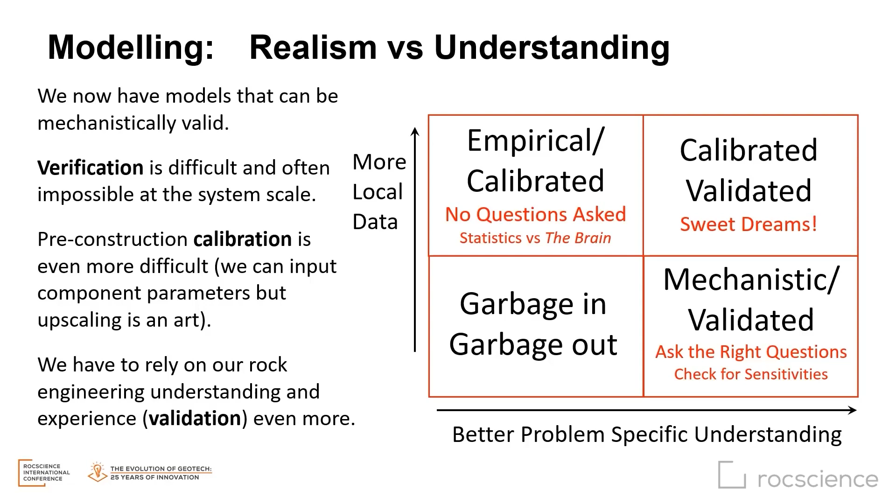If we have lots and lots of data and don't really understand our problem, we're faced with empirical modeling, I would say. And this modeling can be calibrated. We can measure closure in a mine or a tunnel, but we really don't know what's behind that closure.

So some of the questions you might want to ask of your model are: can you identify the behavior modes and the mechanisms? Do you need a different model or a more complex model to accurately represent that? And then what are the critical modes of failure? Within those, what are the limit states that you're trying to get to? And then in that context, are you getting the right data for the model? These are questions that you need to ask before you start.

And one of the things that's a bit of a problem when these models get very complex is how will you measure your answer? I mentioned pillars. How do you know that the pillars are still performing a useful function? Even though they may indicate yield, there may be some deformations.

Closure in rock engineering is actually a tool that we use to allow the rock to support itself. But how much is too much? What are your design metrics? What is in the model and what is ignored?

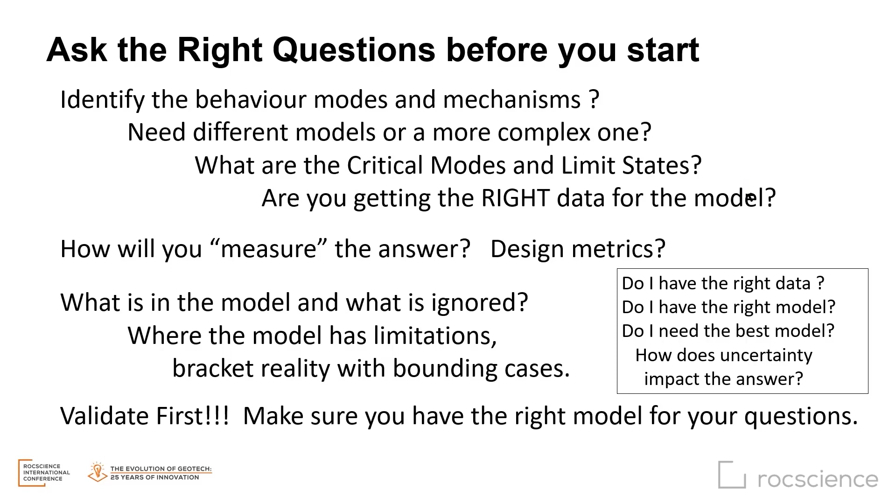In the old days, we knew our models had limitations. We bracketed reality with some bounding cases and we moved on. We didn't assume that our elastic model was telling us everything we needed to know about the rock mass. As we get more complicated, we lose sight of what the limitations of our model are. So we validate first. Validation is the most important thing you can do for your model. Calibration can come later.

So a little philosophical piece here to finish up. I would say prior to the 80s, modeling was an elite activity, people with expertise running the models that they'd written. One of the great contributions of the 80s and 90s was that this process was socialized so that people involved in real projects in construction and real mining could actually do the modeling themselves. Now, of course, this had some issues if those individuals didn't have the skills to run those models, but that was tempered by the fact that the modeling was done on site with the rock in question right nearby.

Now, modeling has once again become an elite exercise, I would say, with these very, very sophisticated, highly powerful, fabulously complex models.

And that's fine, but who's asking the questions now? Who's making the decisions? For this process to work, I'd argue that the interaction between the model experts and the construction and geology experts in the field needs to happen. This process seems to be done fairly well in larger scale mining operations, where the interaction between the modeling groups and the mining groups seems to be quite institutionalized, robust, powerful and productive.

However, in one-time construction projects like tunneling and cavern construction with geological uncertainties, this approach can only be effective, either initially or especially for observational design, if there's a two-way relationship between the modeling and design teams. That relationship has to continue through construction and be receptive to new observational inputs. Most importantly, and this might be a dream, this relationship should be unhindered by contractual constraints such as fixed design or the fear of claims.

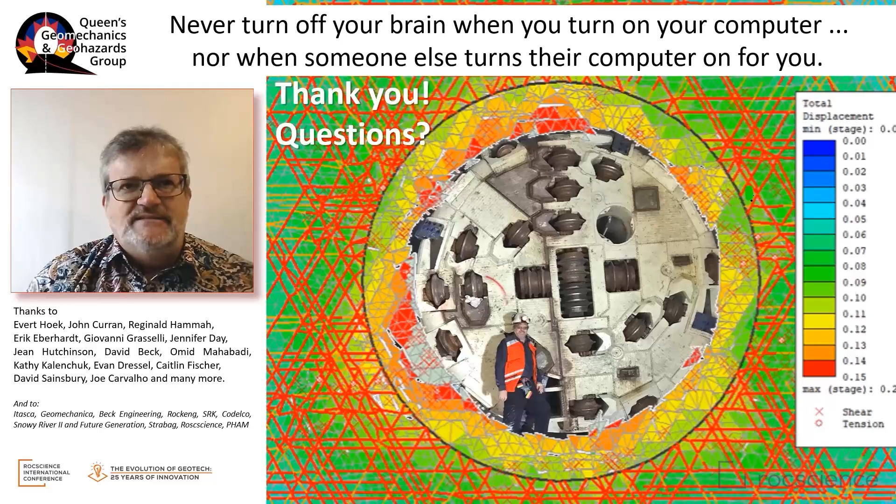Thank you very much, Mark, for a very interesting keynote. You've raised some good points. And as a result of raising good points, I'm going to ask you what I hope is a good question. It's going to put you a little bit on the spot, I think, but nevertheless, we look forward to your answer.

Mark, in your practice, how many modelers do you think, what percentage or ratio, actually ask the right questions before they start modeling? What do you think, based on your experience?

I'm going to restrict my answer to the civil engineering, tunneling, and cavern construction side. I would say up to a third are modeling without understanding the problem. A small anecdote: a very large tunnel in Scandinavia, I was reviewing, and the conclusions were that deformations were minimal and that support was important but not really critical. As I got them to send me their model and zoomed out on the boundary conditions, they had used the default RS2 boundary conditions and fixed everything so that nothing was moving.

That's a level of understanding that's unusually low, but I think there are also just small things that get neglected. One of the challenges is that it's nice to have default values in there, but they're always scary to me. I think that's probably what causes a lot of problems in engineering using simplified models - the availability of default values means they get used even when they're not relevant.